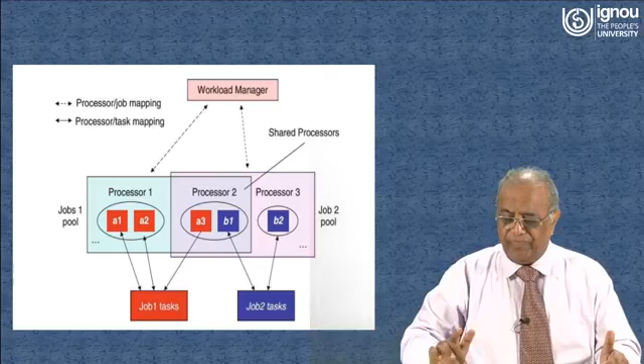Now we see that planning and scheduling is not one person's job; a lot of persons are involved. For example, there are different departments in an organization, like the manufacturing unit, production unit, marketing division, sales division, purchase division. Suppose the marketing division plans to sell some products to the customers, and the marketing division expects that this many products have to be produced by the production department.

So if the production department cannot produce the number of products in time and hand over those products to the sales or marketing division, the marketing division will not be able to fulfill the customers' demand, and definitely they will not be able to satisfy the customers, and there may be a conflicting situation. So a lot of activities are there and several persons are to be involved in planning and scheduling processes, because some jobs are interrelated.

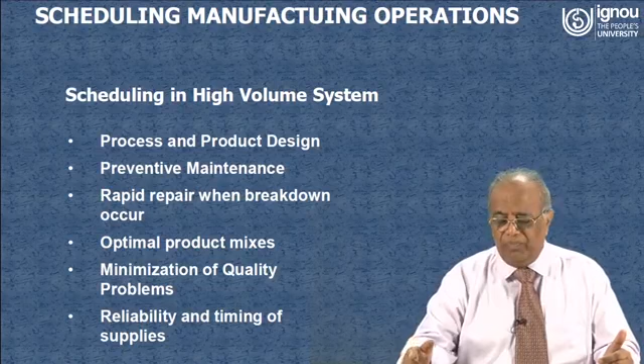Optimal product mixes, minimization of quality problems, and reliability and timing of supplies. This is also very important because the system has to be reliable. Now scheduling in low volume systems requires loading, Gantt charts, assignment methods of linear programming, and these are the standard techniques. But today we will discuss scheduling in a very important case, where n number of jobs are to be assigned to n number of machines, so that we can optimally carry out all the jobs within limited resources, or we have to optimize cost-wise also.

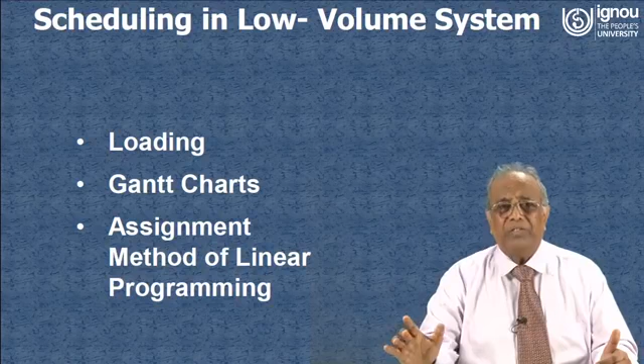Now you think that this is a very simple problem, but if you have 4 jobs to be carried out on any of the 4 machines, the total number of combinations will be factorial 4, that is 4 into 3 into 2, that is 24 options. If 5 jobs and 5 machines are there, then 120 options will be there. If there are 6 jobs and 6 machines, then 720 options. So the number of options will be very high, and each option will give you a different cost. But the Hungarian method will give you the optimal solution very quickly. So let us first discuss what the Hungarian method is.

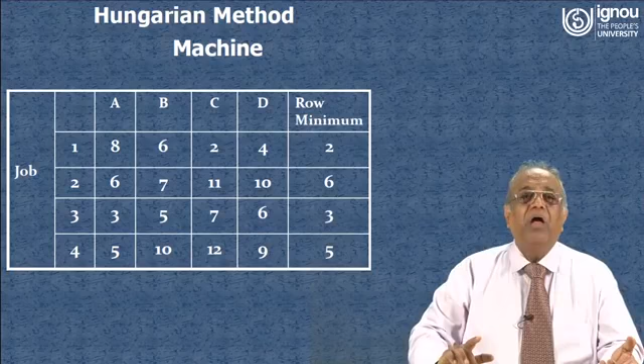Now after these operations you will get this table, by deducting the minimum value in a particular row from the cost given in that particular row for different machines for a particular job. So this table we have got.

After that, as the second step, for each and every column we have to find out the minimum value given for that column. For example, in column A there is 0, so the column minimum for A will be 0. For B the minimum value is 1, for C it is 0, and for D it is 2.

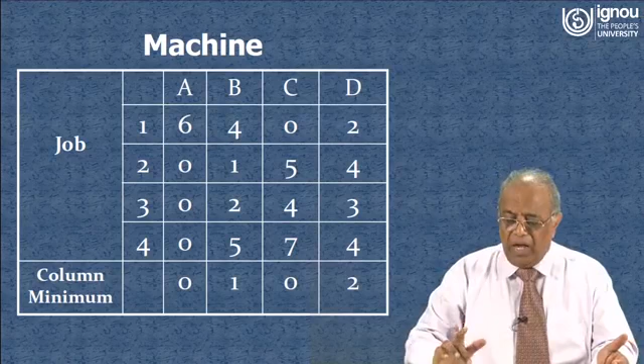Now we have to deduct the column minimum from each of the values given in that particular column. If we have got 0, then 6 minus 0 is 6, and the same value we will get. For column B we have to perform 4 minus 1, 1 minus 1, 2 minus 1, and 5 minus 1, and so on. After deducting this we will get the next table.

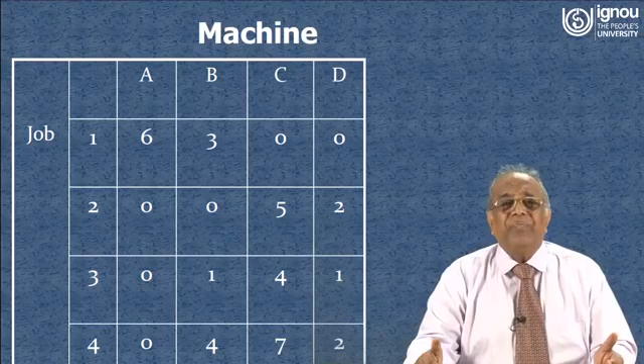So what is the table? This is the table we have got after deducting the minimum value for a particular column from the values in that particular column only. Now you are observing some zeros. In the first row there are 2 zeros, in the second row again 2 zeros, in the third row there is one 0, and in the fourth row there is one 0.

Now you have to cross out those zeros by drawing some lines. If you draw a line on the first row, 2 zeros will be cut. If you make another line in the second row, again 2 zeros will be crossed. Now if you make a vertical line on the first column, that is A, again 2 zeros will be cut. So after putting the 3 lines, all zeros are cut.

Now what are we getting? The uncut numbers are 1, 4, 1, 4, 7 and 2. The minimum value out of these is 1. So we have to deduct this 1 from each of the six uncut numbers: 1 minus 1, 4 minus 1, 1 minus 1, like that, from each of the uncrossed numbers.

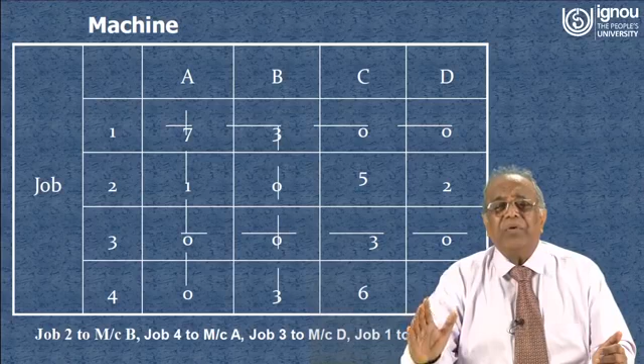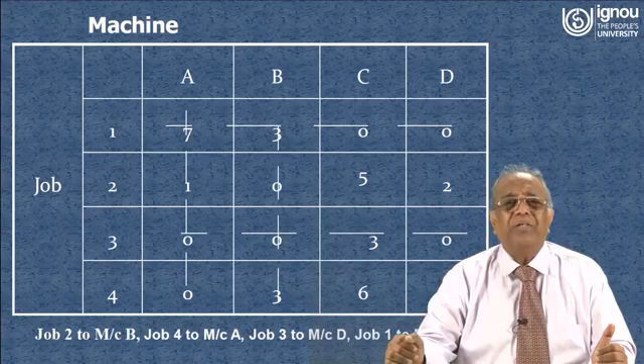After that, again we have to draw lines in such a way that all zeros will be cut. Here we have drawn 2 vertical lines for the machine A column and machine B column, and 2 horizontal lines for row 1 and row 3. Now all the zeros are cut. We require 4 lines, 2 horizontal and 2 vertical, to cut all the zeros. Now this is the position where we have got the optimal solution.

Now my dear friend, how to get the optimal solution? See in which rows you are getting 2 zeros and in which rows only one 0. In row 1 there are 2 zeros, below C and below D, so we will not concentrate on row 1. But in row 2 we are getting only one 0, corresponding to the second row and second column. So job 2 will be assigned to B.

Now if you move downward, you will see that at row 3 there are 3 zeros, so that is not the optimal solution. Last row, first column, that corresponds to job 4 and machine A.

So job 4 is assigned to machine A. So machine A and machine B are already allotted. Now the rest is C and D machines, and for them again we have to perform the same way. You move from the top, that is the first row. Here you are seeing that there are 2 zeros: one 0 is below C and another 0 is below D. So it is not the optimal solution, and you move to the next row.

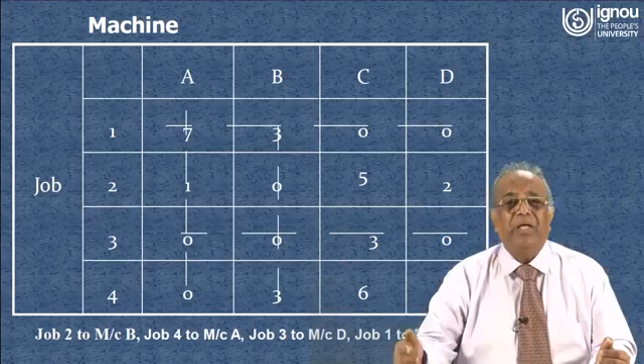So this is the optimal solution: job 2 is assigned to B, job 4 is assigned to A, job 3 is assigned to D, and job 1 is assigned to C. Now come to the table. Job 1 is assigned to C, the cost is ₹2; job 2 is assigned to machine B, cost is 7 units; job 3 is assigned to machine D, cost is 6; and job 4 is assigned to machine A and cost is 5, so total cost will be ₹20.

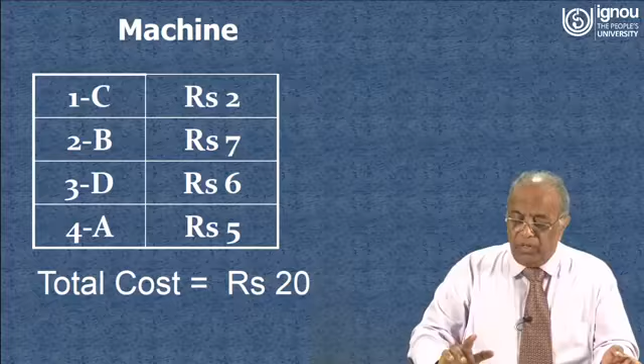So you see that there are 4 machines, 4 jobs, and the number of options will be factorial 4, that is 24, but here just after a few steps we are getting the optimal solution. So this solution is feasible if n machines are available for n jobs. Now we will move to another sequencing problem, where n jobs are there and 1 machine is available. So for that sequencing problem, how can we perform?

This is a very interesting problem. There are several ways we can do it, and we will see how we can do it in different ways for this sequencing problem, where n jobs are there, but we have to perform all the jobs in one work center. So sequencing means determining the order in which jobs at the work center will be processed. What is a workstation? An area where one person works, usually with special equipment on a specialized job. That means only one person is there with specialized equipment for performing multiple tasks, so that n different jobs can be performed on that particular machine. That is one work center.

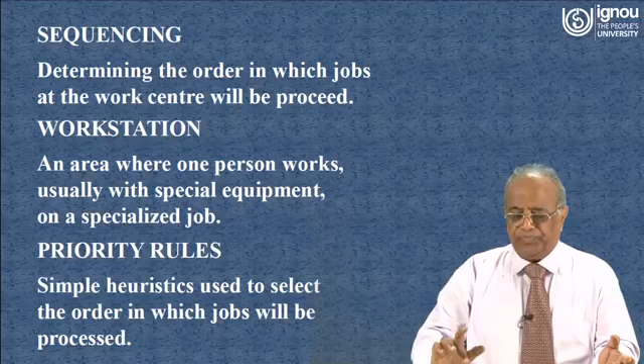So priority rules are simple heuristics used to select the order in which jobs will be processed. Now what is job time? The time needed for setup and processing of a particular job. That is the definition of job time, how much time should be allocated for that particular job if it is to start immediately. Now job flow time: this is the length of time a job is in the shop or work center. So if the processing time is 4, that doesn't mean the job will be completed within 4 unit time. We will see while discussing the numericals how it will vary.

So the total job flow time we can calculate starting from the first job and ending with the last job; that total time is known as the job flow time. And if you calculate the job flow time for all the jobs in a workstation, we can calculate the average job flow time. Job lateness is the length of time the job completion date is expected to exceed the date the job was due or promised to a customer.

Suppose you promise a customer that the job will be completed after 10 days, but it is completed within 8 days. So there is no lateness for completion of the job. The customer will definitely be happy because they will get the job within the pre-assigned time. But if you promise the customer that the job will be completed after 10 days, but you deliver that job after say 14 days, then there is obviously lateness for that particular job of 4 days. So that is job lateness.

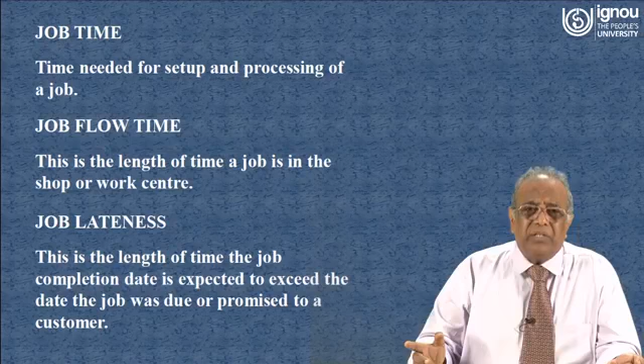In fact, job lateness is calculated in this way: due date minus delivery date. If it comes positive, then there is no lateness, so lateness is 0 in that case. If the job is to be completed after 10 days and you are delivering the particular job after, say, 14 days, in that case the lateness is 4 days. And if you are promising the job after 10 days but you are delivering the job after, say, 8 days, you are delivering before time, so lateness is 0.

So let us see how we can solve these problems. Then one very important thing is makespan: the total time needed to complete a group of jobs from the beginning of the first job to the completion of the last job. Average number of jobs can be calculated with the help of total flow time and makespan. So average number of jobs at the workstation is equal to total flow time divided by makespan.

Now let us see how we can perform the jobs. So let us do this problem. The problem is given like this: processing times including setup times and due dates for 6 jobs waiting to be processed at a workstation, work center, are given in the following table. Determine the sequence of jobs, the average flow time, average job lateness and average number of jobs at the work center for each of these rules.

FCFS, that means first come first served. Sometimes the jobs have to be completed on a first come first served basis, because if you go to any restaurant, after paying the bill in advance you have to deposit the slip, and the restaurant people will supply the goods on a first come first served basis.

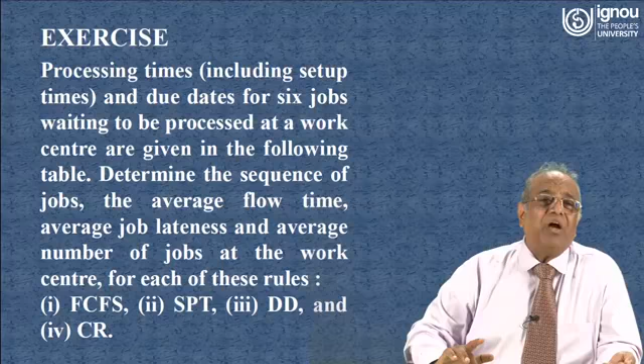But in a manufacturing unit or production unit, we may have some other options like SPT, that is shortest processing time, which jobs take very less time, we have to consider accordingly. DD means due date, consideration from due date, or CR means critical ratio. We have to divide due date by processing time, and we will get the critical ratio. On that basis we have to sequence. Now first let us start with FCFS, that is first come first served basis.

Here there are 6 jobs, job A, B, C, D, E, F. For job A the processing time is 2 days, for job B processing time is 8 days, job C processing time is 4 days, job D processing time is 10 days, job E processing time is 5 days, and job F processing time is 12 days. Now due date for job A is given as 7 days, due date for job B is 16 days, for job C 4 days, for job D 17 days, for E 15 days, and for F 18 days.

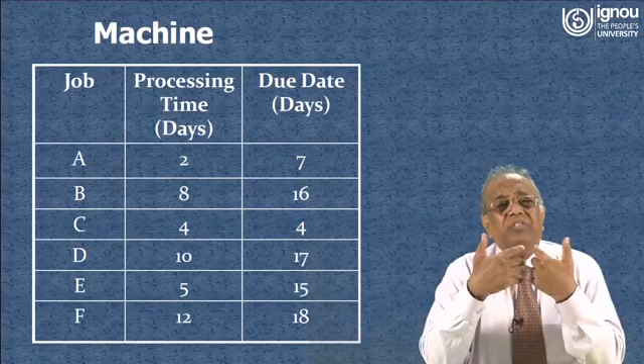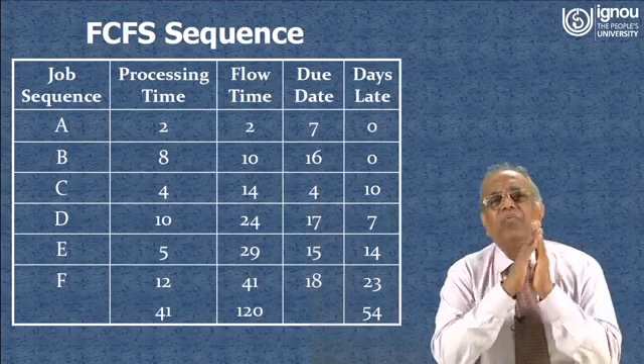Now you see, for all the jobs, the due dates are given in such a way that if you consider job A to start immediately, then after 2 days you can complete the job, and it is ahead of the due date. Now let us see how we can perform the sequencing on the basis of FCFS, the first come first served basis. That means first job is A, then B, then C, then D, then E, then F. We are not considering due date or processing time. As soon as the sequence comes, immediately we will start.

So flow time for A is 2 and flow time for B is 10. Why is it so? Because first the job A has to be completed. It will take 2 days, only then job B can start. Job B can start after 2 days, but processing time for job B is 8. So the total time job B will be on the shop floor is 10. So 10 days is the flow time.

Now after 10 days job C can start. So job C will be completed after 14 days. So 14 days is the flow time for job C. So after 14 days, job D can start. That means job D will take 24 days to stay in the workstation for completion of that particular job.

So like that we can calculate the flow time for each and every job, and if you calculate all the flow time, the total flow time will be 120. Due date is given. Now you see that job A is completed in 2 days and the due date is given as 7, so there are no days late for that, so 0. Job B is completed within 10 days but the due date is given as 16, so late is 0.

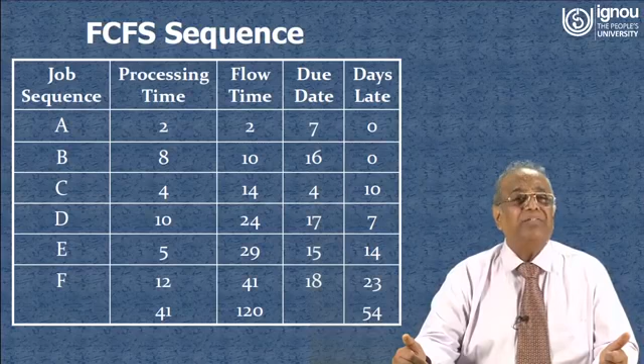But job C, due date is given as 4 but you are completing that particular job after 14 days, so there is 10 days late for C. Same thing, 7 days late for D, 14 days late for E, and F will be completed after 41 days and the due date is 18, so late is 23. So total late for all the jobs is 54.

Now we can calculate very easily. Average flow time is total flow time divided by number of jobs, that is 20 days. Average job lateness is 54 divided by 6, 9 days. Average number of jobs at the work center is 120 by 41, that is 2.93.

Now my dear friend, we will start the SPT rule. SPT means shortest processing time. You see that A takes only 2, so A has to start immediately; that is the shortest processing time out of the 6 jobs. After that comes C, because C's processing time is 4, so we have to start C just after completion of job A. After that the next shortest processing time is 5, that is for E.

Next shortest processing time is B, that is 8. Next shortest processing time is for D, and lastly the job with the maximum processing time we have to start last. We have to do that job at the last.

So flow time, we know how to calculate the flow time. Flow time for A is 2, flow time for C is 6, because 4 is the processing time. It can only start after the completion of job A, which is to be completed after 2 days. So we can calculate flow time for each. We can calculate the total flow time, that is 108, and makespan time, that is 41.

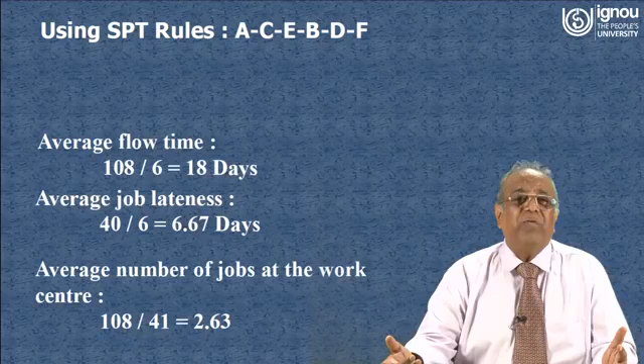Now there is no problem calculating average flow time, that is 108 by 6, that is 18 days. Average job lateness is 40 divided by 6, and average number of jobs at the work center is 2.63.

Now this is the third way of scheduling, that is using the earliest due date. The earliest due date is for job C, that is 4, then 7 is the due date given for job A, next due date is 15 for job E, next due date is 16 for job B, and the next due date is 17, that is D, and the last one is F, given as 18 days. That means within 18 days you can deliver those goods.

So the sequence for this method, if you consider the due date as the criterion for scheduling all 6 jobs, is C, A, E, B, D, F. C has to be first. If C has to be completed first, the next is A, E, like that.

We can calculate the flow time, that is 110. We can calculate the number of late days, that is 38, and of course the makespan will be 41 for each sequence. Now here you calculate the average flow time, that is total flow time divided by number of jobs. It comes out to be 18.33 days, and next one is average job lateness.

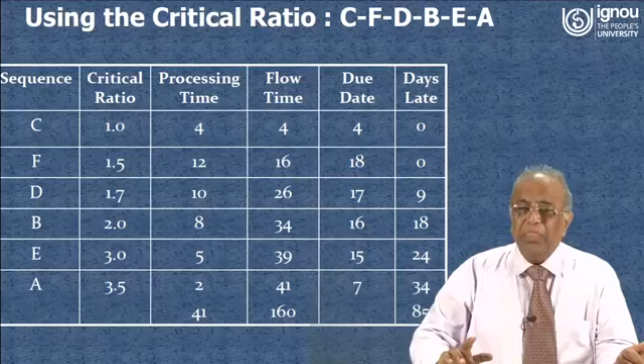And for job A, the due date was 7 days, the processing time is only 2, but it had to start after 39 days, so that's why the flow time for job A is 41 days. So 41 minus 7 is 34 late days for job A. So total days late is 85. Now we can calculate the average flow time, that is 160 by 6, that is 26.67 days.

Average job lateness is 85 divided by 6, 14.17 days, and average number of jobs at the work center, that is 160 by 41, that is 3.90.

So we have discussed FCFS scheduling method, that is first come first served criterion. We have discussed about SPT criterion, that is jobs can be scheduled on the basis of shortest processing time, that we call SPT criterion. And the third one we have discussed on the basis of job due dates. So in that way we can sequence the jobs. And lastly we have considered the jobs

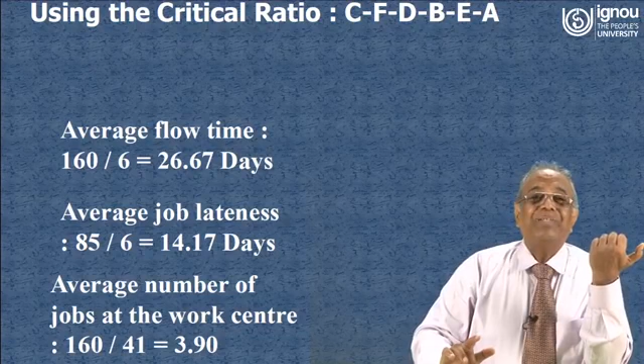ratio. So if you see the average flow time on a first come first served basis, average flow time is 20. Average flow time for SPT, that is shortest processing time, is 18.00. Due date average flow time is 18.33, and for critical ratio the average flow time is 26.67.